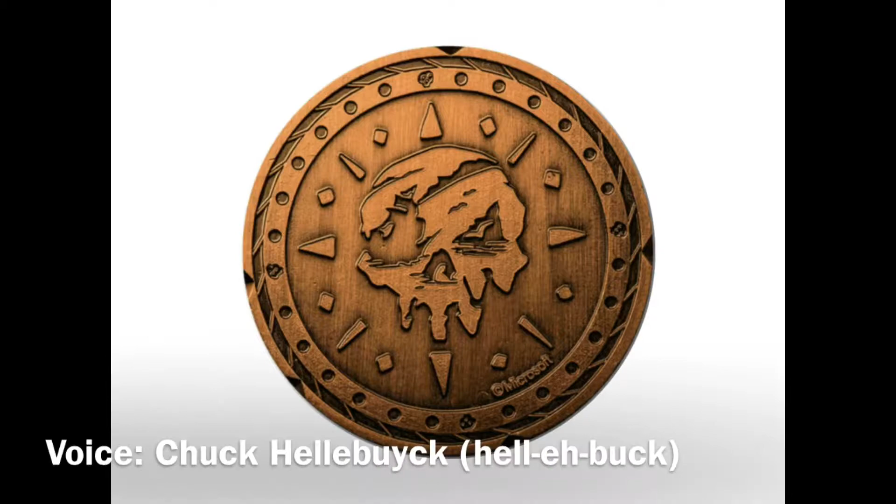One of my family members asked me, can you 3D print a Sea of Thieves coin? Well, let's see if we can, right here at Filament Friday.

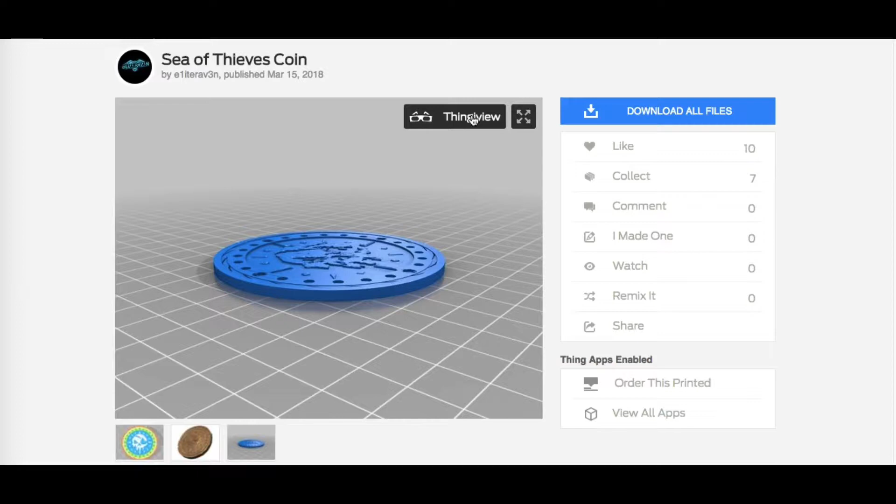But his STL file, which is the actual file of his design, looked really good on top, but I wanted to see the bottom. So I clicked on Thingiview so I could 3D rotate this. And when I did, I discovered that it's a two-sided coin. The bottom has pits and ruts in it. That's going to be really difficult to print. If I printed this on its side, I might be able to do it. Some people always recommend that. I haven't had great luck with that.

The slicer I use to convert the image into a file for the 3D printer is Simplify 3D, but I haven't had great luck printing fine detail with Simplify 3D, even with all their settings. I found better luck with Cura. This is a free slicer, version 3.2.1 is their latest, so I decided to use that.

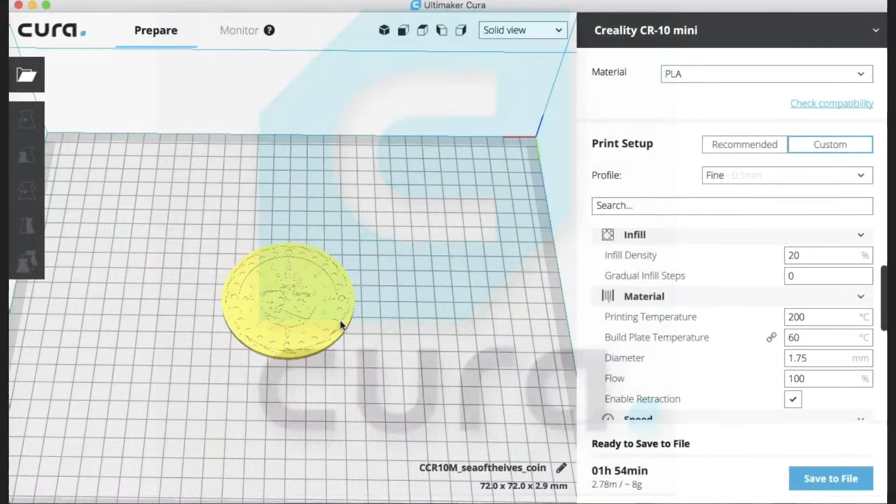I loaded the coin into Cura, and here it is on the bed, and I realized it's too big. This is going to be too big for a little kid's hands. It says it's 72 millimeters in diameter, so the first thing I need to do is shrink this down, and I also want to make it thicker, more like a true gold coin.

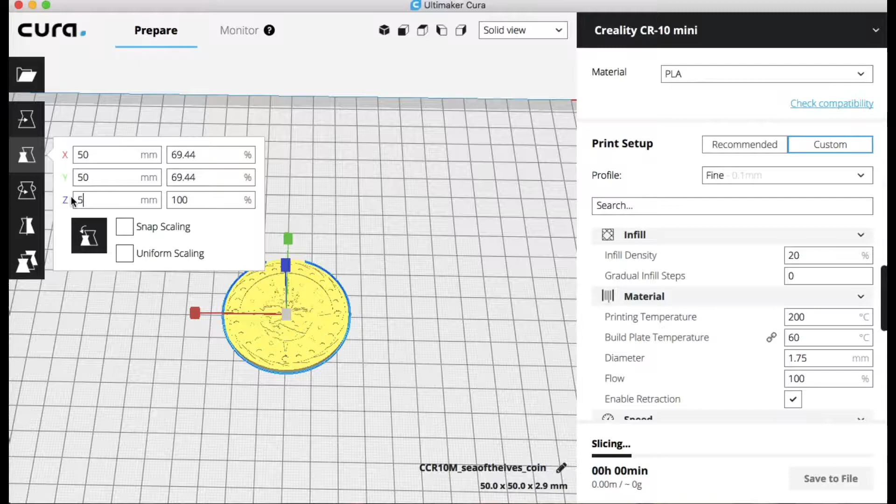So here's the dimensions that I can change. So it's 72.006. I'm going to make it just 50 millimeters by 50 millimeters. That's going to be the new diameter. Now it's 2.9142 millimeters thick. I'm just going to make that an even 5 millimeters. Then I'm going to lower this below the bed, and I'll explain why in a minute. So here's the coin all resized. I think this should be a good size for a kid's hand and nice and thick.

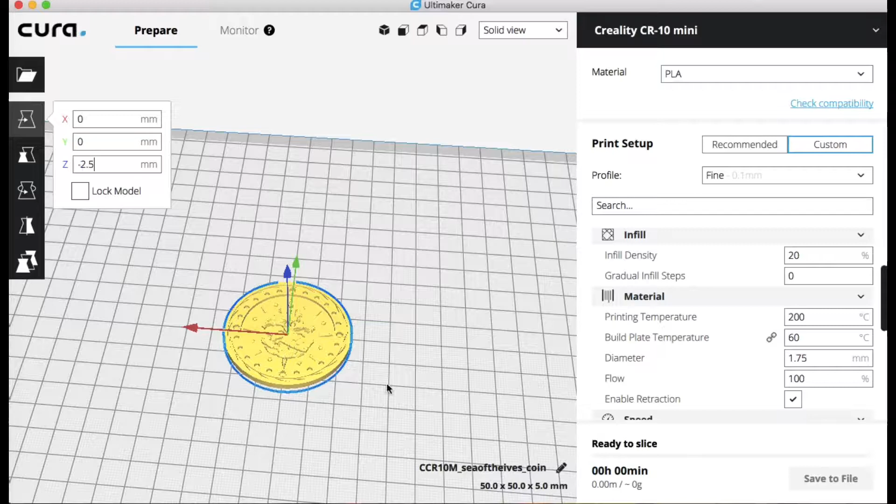So now I need to lower this below the bed because anything below the bed won't 3D print. So I'm going to lower it minus 2.5, so halfway. If I zoom in here, you should be able to see, yep, there it is, halfway. So anything below the bed is not going to print. So I'm going to get a nice flat surface, and it's going to be 2.5 millimeters tall.

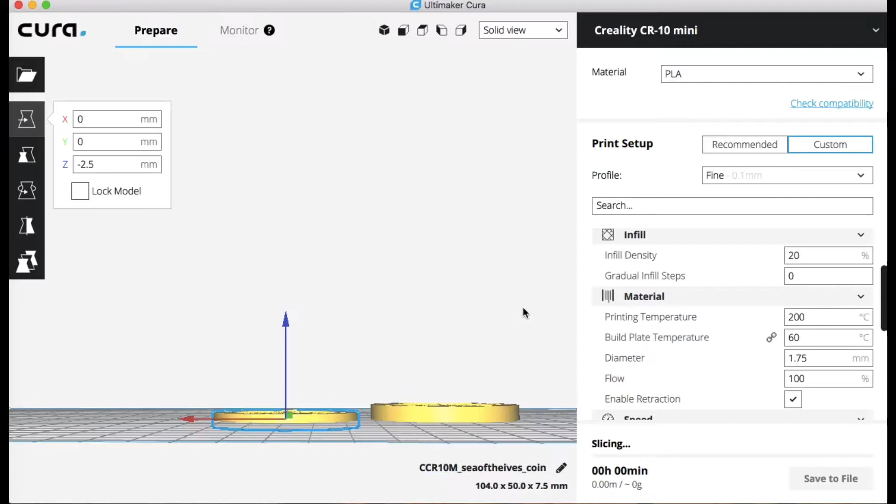So now I want to duplicate it, make a second one. And it should come out to the same, yep, same thickness, same diameter. Now I need to lower this one 2.5, and then I'll have 2 halves that I can glue together. So I'll click on it, make it minus 2.5, lower that one. So now I'm going to have 2 halves that don't print and 2 halves that do print on top. So I'm just going to center them here, and then I'll run through the settings.

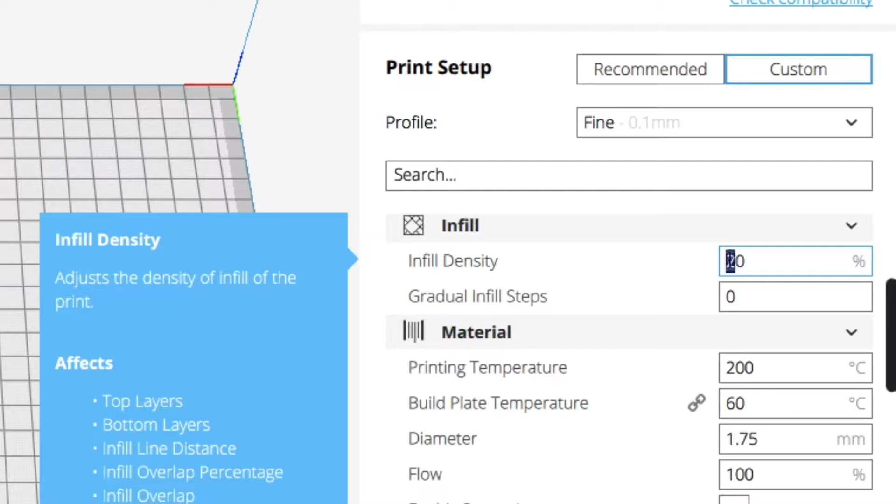I'm going to use a fine 0.1 setting and a 50% fill. That's how much plastic will be filled into the print. I want it nice and solid.

And then for temperature of the plastic, I'm going to use 205 degrees C. I know it works with this bronze or gold plastic that I'm using. 60 millimeters per second for speed is way too fast. I'm going to lower that to 30. Give it time to really print the detail.

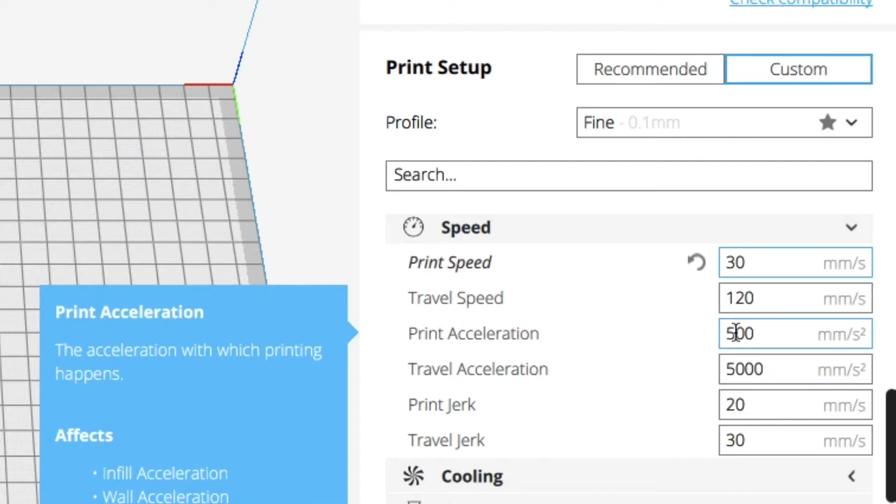Acceleration is way too high here, so I'm going to lower this down to 200, and then travel acceleration, I don't want this thing jerking around doing a fine print, so I'm going to lower that to 2000. That's just experience working with my printer. And the rest of this looks pretty good.

The only other thing I need to fix here, it's going to print a skirt by default. I want none. This is nice and flat, I don't need that. Then it's going to print everything at once, not individually. And once I'm done playing with the settings, this thing automatically starts slicing. Slicing is where it converts it into the G code that the 3D printer understands. It converts it into a bunch of lines and X and Y movements.

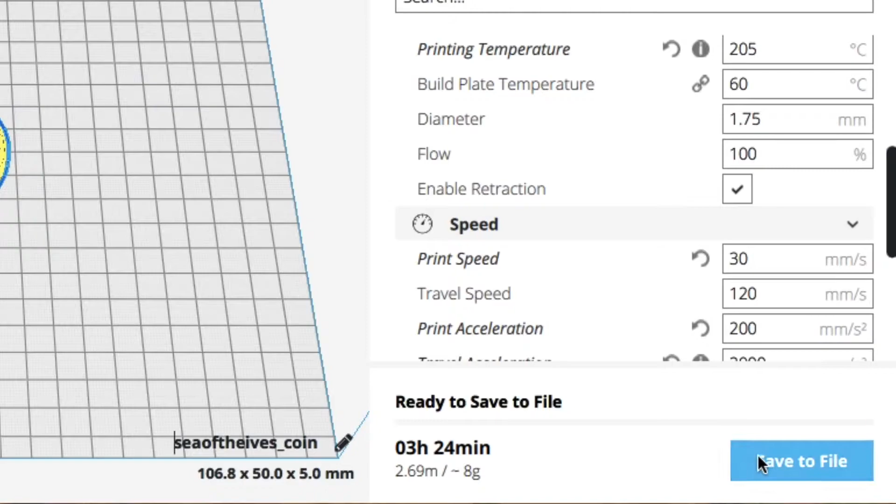And then it tells me roughly how long it's going to take, and it's saying it'll take 3 hours and 24 minutes. Now that's just an estimate, but bottom line is it's going to take some time. Now I'm going to change the name here, get rid of the extra CR stuff they put in the front. I just want Sea of Thieves. I'll save this to the SD card, pop the SD card into my printer, start to print and walk away.

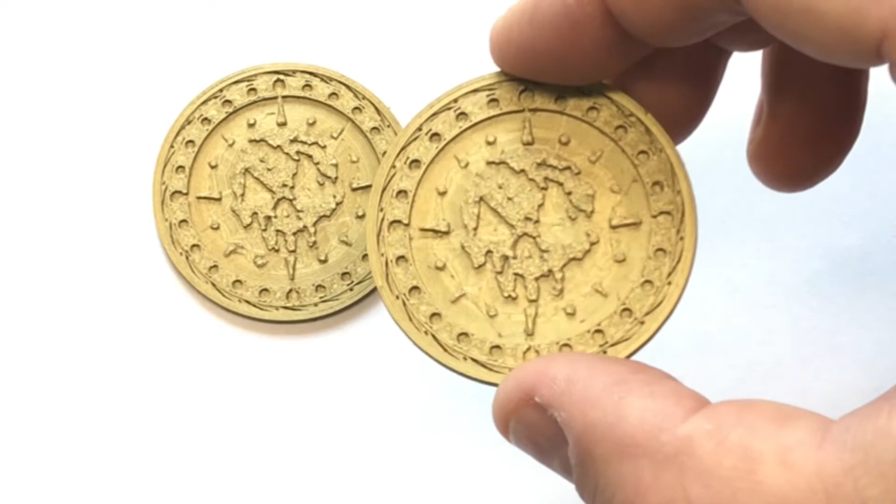Here's a quick time lapse of it printing the 2 coins. You can see it got dark. I printed this at night, so in the next morning, here are the coins. And I got to tell you, they came out really nice. Look at the edges, nice and crisp on the skull. The arrows look pointy and good.

There's not a lot of stringing going on. It's not the best, but it's pretty darn good for these coins. And the back of them, nice and smooth because I cut those bottoms off. So now I can glue these together.

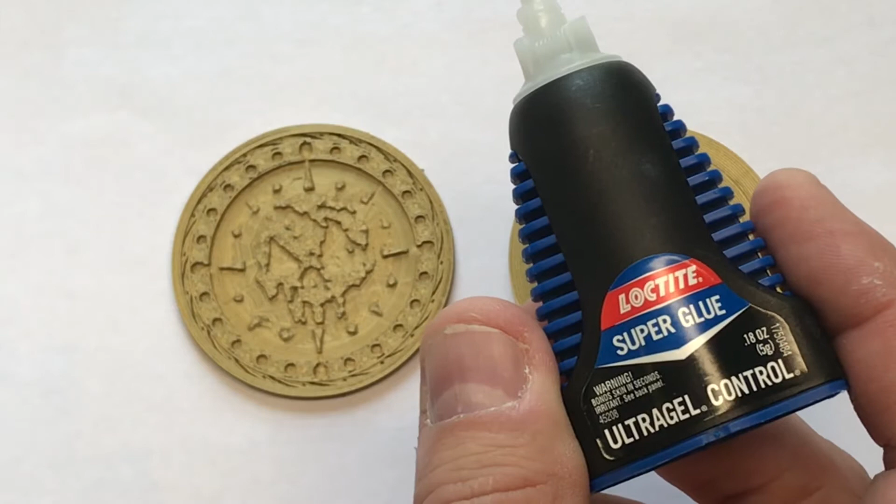Now we're to the final step, gluing it together and make it a real coin. I like to use super glue, ultra gel. It seems to work really well with this PLA plastic that I'm using. I've done this before with other coins.

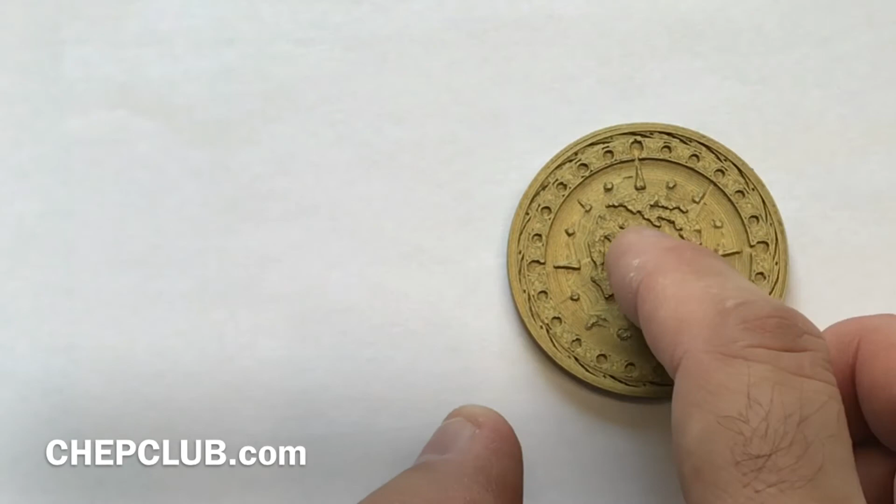So I lined up the coins so the skulls are both pointing in the upward direction. The arrows should be lining up. So all I needed to do was line up the edges and push down. Once I did that, I let it dry for a couple hours, and here's the coin.

I got it lined up good, and both sides, it's a two-sided coin, both sides looking really good. I think the kids will have a lot of fun with this. Next step, I probably got to print about 50 more.